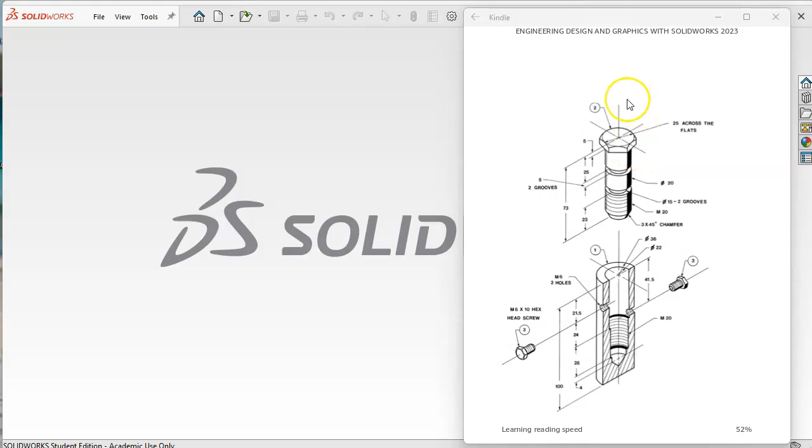The hex on top, I'm just going to make this circular and then pick up the hex. We're 25 across the flats, so that'll give me that geometry.

So let's get started with a new part, metric. I'll go into the front plane and open up the sketch.

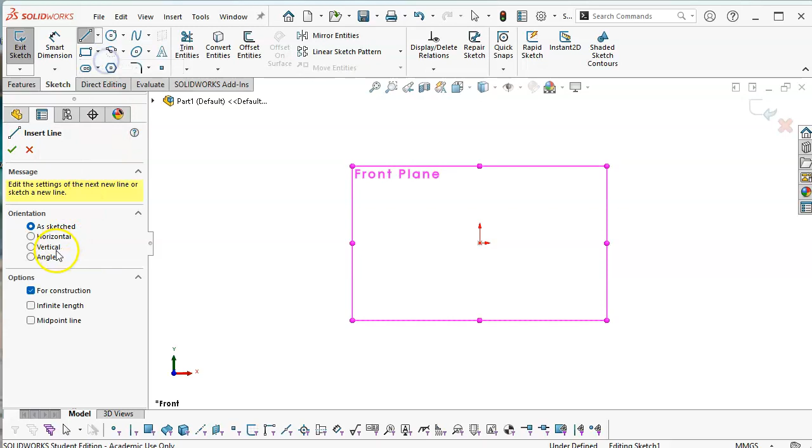We're going to do a center line, vertical, infinite length, and place it on the origin.

If it misses, I'm just going to drag it back to the origin. Occasionally, though I haven't seen it in a while, the center line doesn't go fully defined. If it doesn't, just grab it, drag it, it'll snap back to the origin and make it coincident. And if not, then we'll just add it manually.

So I want to go ahead and close this off.

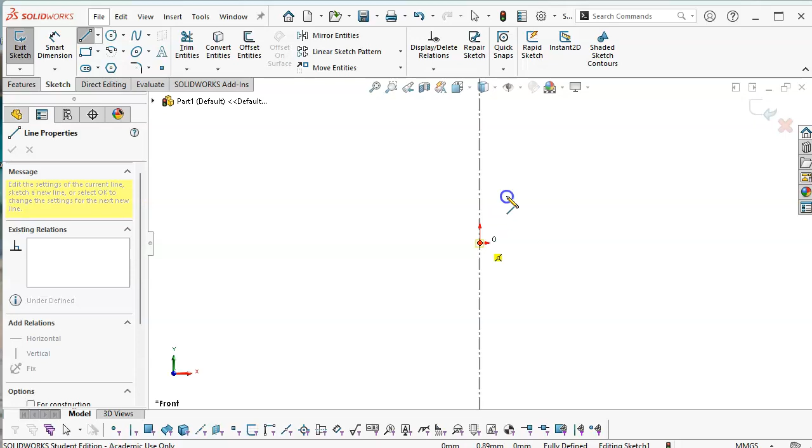We're going to look at this in two examples of what happens when you don't do the center line. So anything that's away from the center line is going to be a cavity or a hole.

And so if I draw that first, then when I go to complete the revolve, it won't ask me to close off the sketch. So I'm going to rough these in.

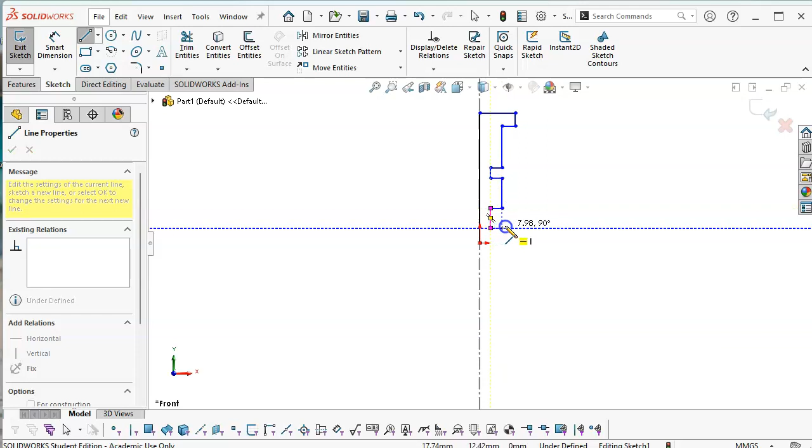And if I miss a little bit, well, we'll figure it out. So I just connect the dots. We'll make that horizontal, and deal with whatever strangeness it does, because the downside to sketching the entire profile is always whether things move as expected if they move around.

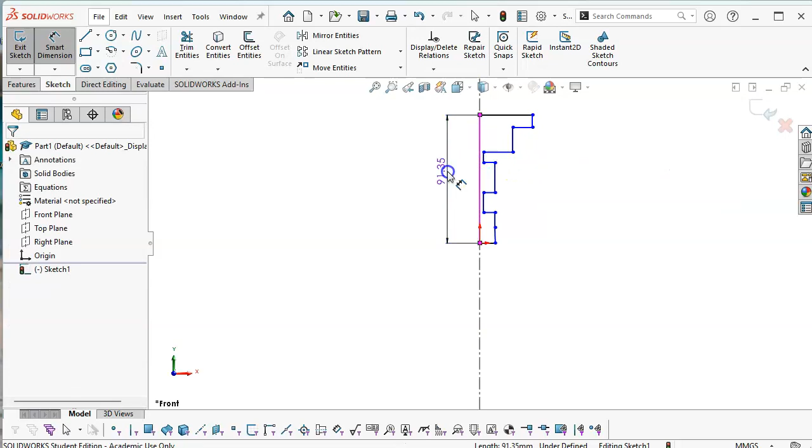So with the first dimension, it scales, and it didn't do anything really strange with the geometry.

So we can go ahead and start our diameters, and that'll be the 25. And then with the D next to our dimension, that's telling me that it's automatically going into diametral.

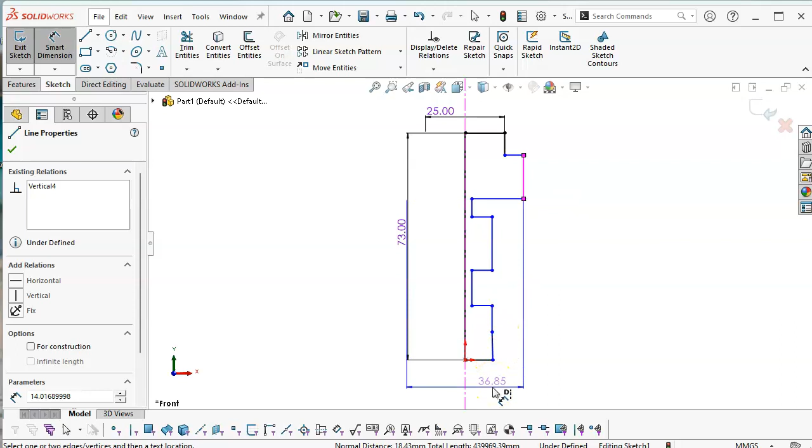So I'm going to bring that one down. We know that the body for the M20 and the 20 millimeter threads, or the 20 millimeter body, are all going to be the same.

So select, control-select. Pick the first one, hold down the control button, select, and select again.

Well, my chamfer didn't quite stay, so, oops. Let's control-Z the construction geometry. Not ready for that just yet.

Let's go collinear, now drag this down a little bit, put it in. Now we could always put this in as a separate feature, but one of the reasons we'd choose a revolve is I can get a lot of geometry in one feature.

If I was to do this as a boss, I would extrude out to here, and then the center section, and then here, and then go to the next one, and then just kind of keep building up.

Or I would draw the center to the full length, and then add the offset for the notches. So it would end up being at least 5 or 6 features.

So let's go with the two inside - we'll make those collinear, and they're also both 5 millimeters, so I can set those to equal.

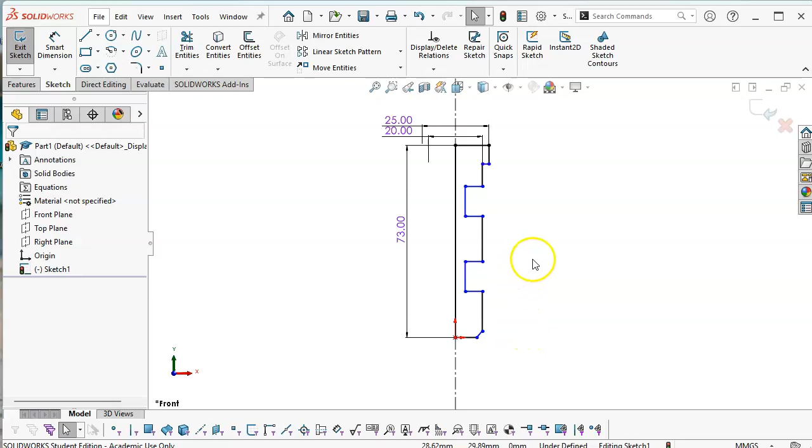We have a 5 millimeter, diameter of 15 millimeter. So we'll pick that back up. Because I did something else with the relations, it jumps out of the diametral mode.

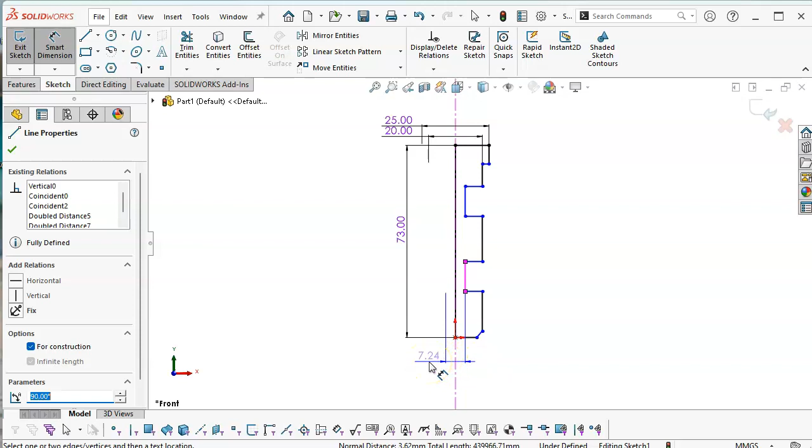And just keep in mind, when you're between the object and the center line, you're creating a radius. When you're on the opposite side of the center line, that's when it jumps to diametral. So 15. And to get out of diametral, then we're going to go ahead and hit escape.

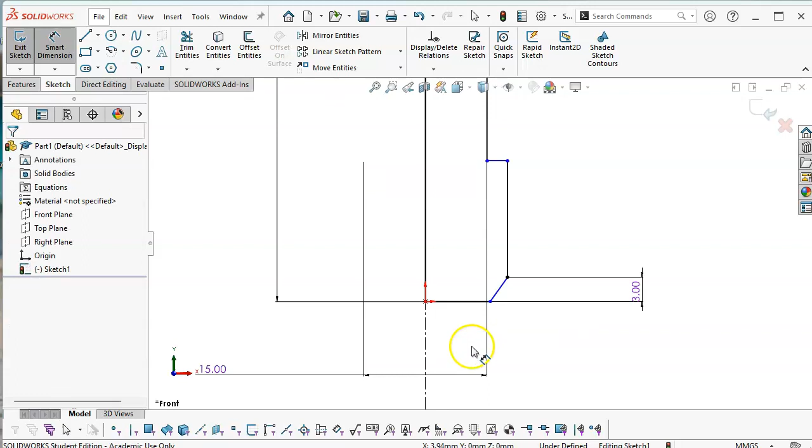All right, so we got 3 millimeters for the height. And I got the midpoint, so I'll zoom up a little bit more. And the 45 degrees - to the first section is 23.

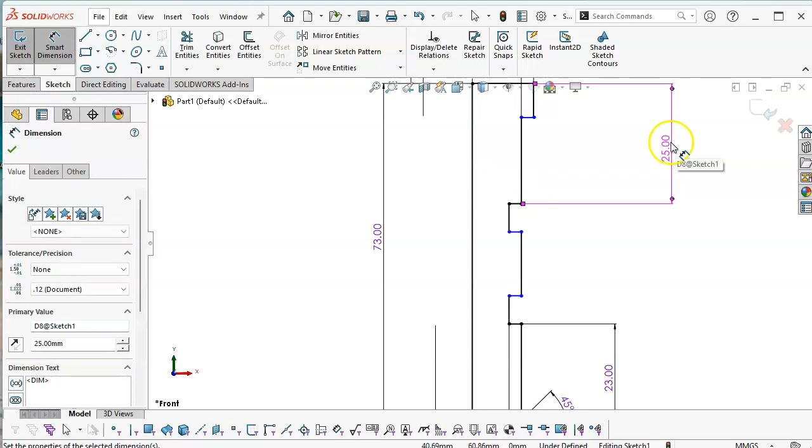Just using the scroll wheel again to move around and create the geometry. So the 25 is from the top to the top of the groove, and then we have the 5 millimeter for the height of the hex.

I need to put the dimension there, and that should do it. Okay, so everything's fully defined.

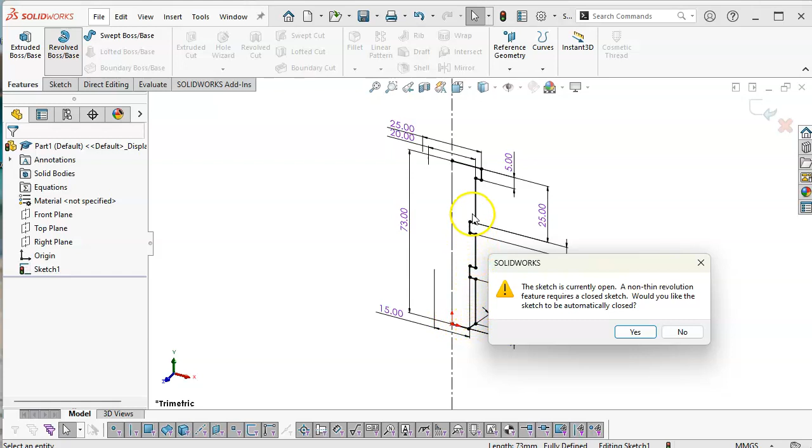Now, one of the rules is that if I have more than one center line, it's going to ask me which to select. By drawing this piece first, when I do the revolve, it's automatically going to give me the preview. So I'm going to switch this over to a construction line for the example and go to revolve. It says the sketch is currently open, which would make this a thin feature, meaning it would have an offset around all of this geometry, and the inside would be hollow.

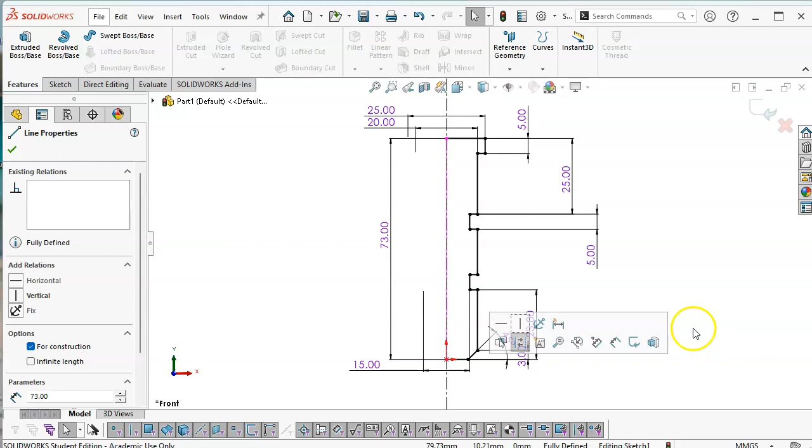So if I say no and kick that out, I'm going to go back and find my center line. One of the problems with duplicate entities is that I have to find that center line. So I'll do a left to right window pick and go back to from for construction, uncheck that, and go to an object line.

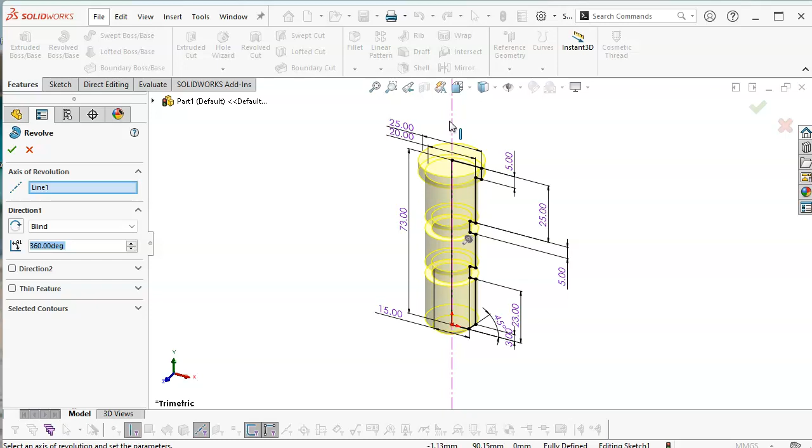Now when I do the revolved boss, you can see no warning, 360 degrees, one center line. Even if there are more center lines, I've created geometries that I needed to mirror or to create dimensions from, and it just means that this box will be empty.

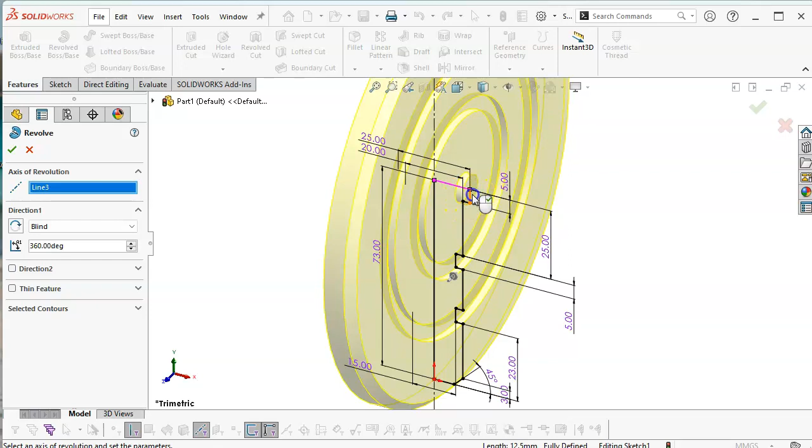I come over and select it. At any time, as long as this is not self-intersecting geometry, I can change that shape. But when I get down to something like that, it doesn't show me the preview because this little nub will overlap into itself. So self-intersecting geometry is not going to work.

So we'll go ahead and create our shape and put the hex on the top. So back into the sketch.

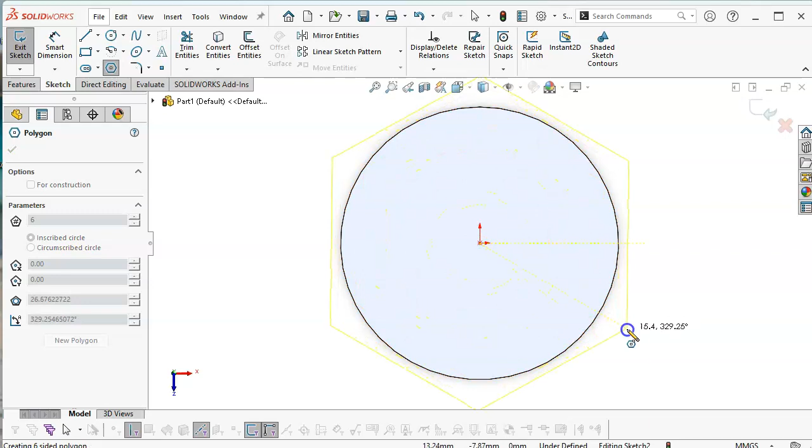Because we already set it at 25, I can drag this out. We're on an inscribed circle. So I'll just get out of that, hit select, control select, and this is one of those cases where we can do co-radial, same center, same radius.

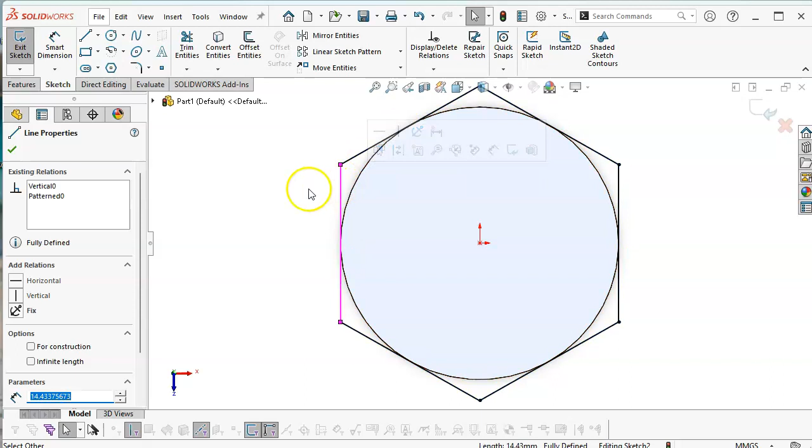Doesn't really matter for our flats. One of them will be vertical or horizontal, just depends on how you want to see it. I'm going to rotate over so I can see that bottom surface because that's what I'm going to use to create the extrude.

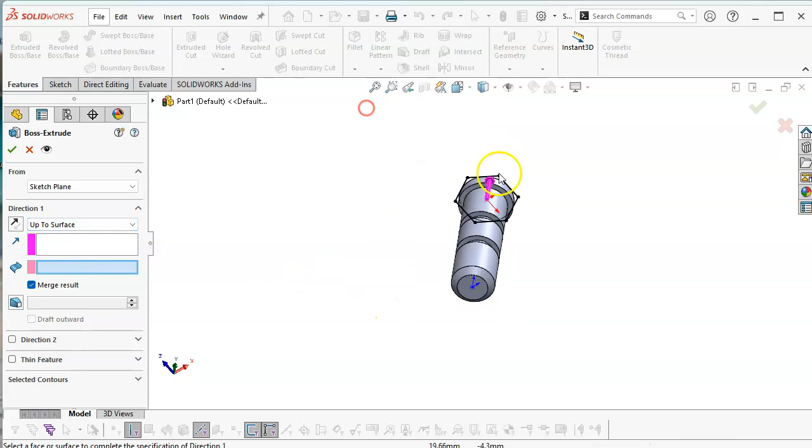Extruded boss base, up to surface. Well, it rotated back for me, so I'm going to rotate it again. Pick that face, and that's going to create the extrude.

All right, we'll do the chamfer last. There's not really a number given, so we can pretty much pick whatever we want, probably 2 millimeters on that chamfer. But let's go ahead and go into the threads. Chamfers and radiuses, as a general rule, I want to do last.

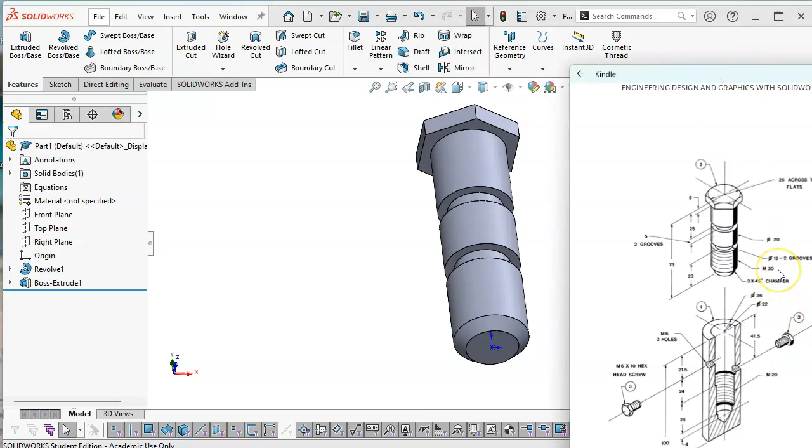All right, so our drawing says M20 but doesn't give us a thread pitch. So whatever we pick, we're going to have to stay with that. So I will pre-select first.

I want this bottom edge. I've already added this to my features, but it jumped off the screen again. So right at the very bottom, insert annotations, cosmetic thread, and we're picking the edge.

If I hadn't pre-selected, I would have to pick that. It's going to be machine threads, and what are the other ones? Straight pipe tap thread.

M20 by 2.5, so just doing a quick conversion to inch, that's about 100 thousandths, which would be 10 threads per inch. The 2.0 is about 80 thousandths, and the 1.5 is 60. So kind of a fine, extra fine, fine, and coarse.

So we'll just go with the 2 millimeter, and I want this for a depth. Oh, there's the end condition. Let's just go up to next, and it should find this geometry and terminate.

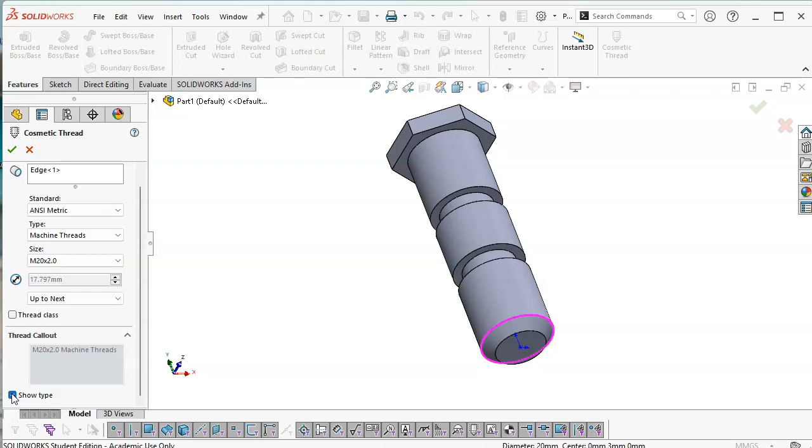All right, if you show type, it puts in the note, and I'm not overly fond of the note. They are functional, but I don't want to see the machine threads note. I usually put other details with that geometry. All right, so that gives me a cosmetic thread.

At that point, I have enough information to create the working drawing, except for my chamfer, but we have enough information here to create the drawing and have our part. So for the cosmetic thread, I can make a configuration for simple threads, where when we do modeled threads, you want to make the choice because it's going to increase the file size.

Speaking of which, might as well go ahead and save.

Let's go into my drive. One thing to note: if you're using a cloud drive for your working folder, we had an issue in the lab the other night, so I shouldn't really be doing this out of the SolidWorks save as, but we'll manage. This one is for Google Drive. We want to make it available offline, so if there's a disconnect, you'd still have access to this folder. I already created my P6-11 folder. For my project, we're going to call this the hex screw and save it.

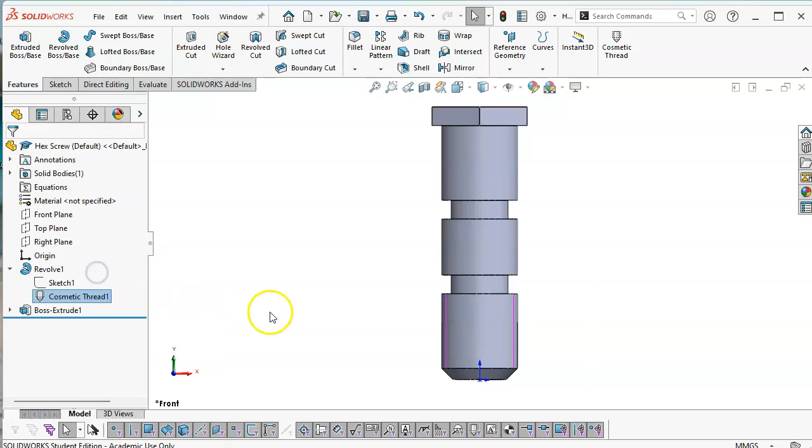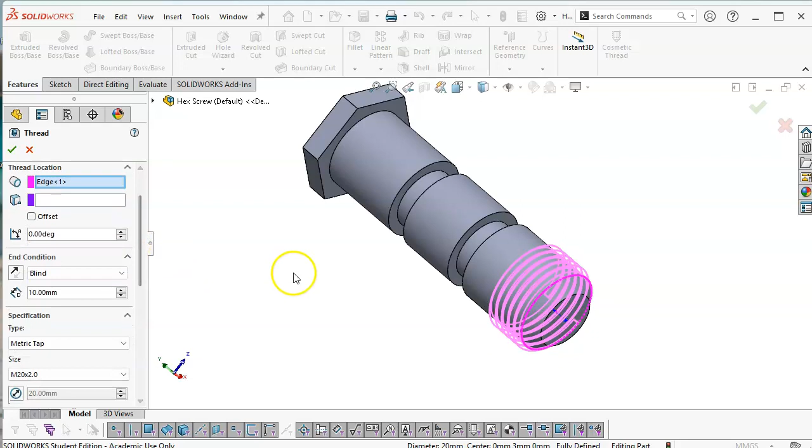So let's continue on with the threads. I mentioned we can create a configuration, or I could just hide these and determine the thread now. Modeled threads make the drawing a little less readable, which isn't my preference. So when we go to the hole wizard and then the thread, it's going to warn you about production quality threads. It'll be close enough for a 3D print with a little adjustment, but if you need to really dial it in, the swept cut will give you a lot more control.

All right, so this is showing me an external thread, so metric tap, and for the end condition, let's go up to selection and I'll grab that face, and I want to see these in detail.

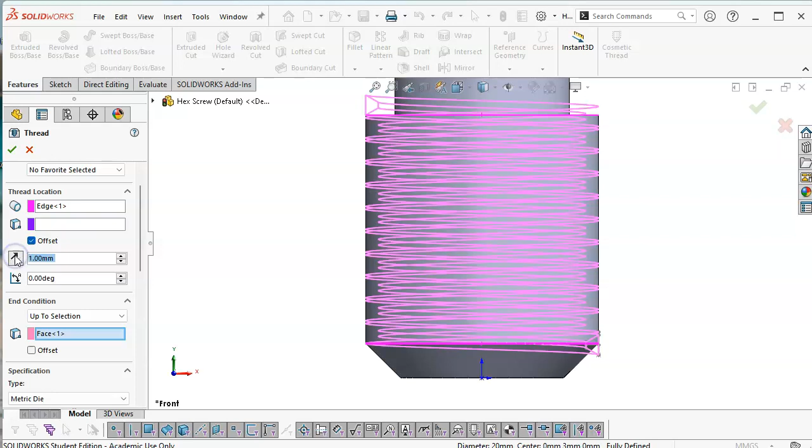All right, so we need to switch to a metric die. The tap makes internal threads, so we could use that on the body, but it's not going to be very functional on the external. You can see this thread terminates here, meaning it's not really going to complete—there'll be maybe a quarter thread before it picks up. So we're going to scroll back up to the offset, 1 millimeter up, probably 2 millimeters down, which is the pitch. That gets me completely off the geometry at the bottom, and completely off the geometry at the top.

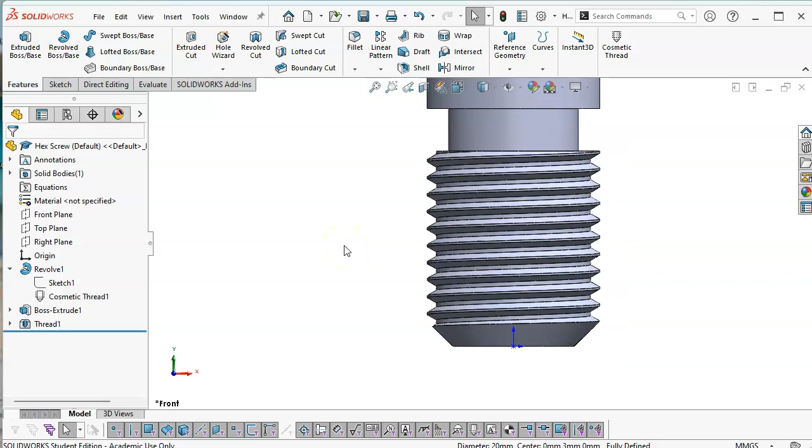Okay, let's go ahead and see what that looks like. It has the crest and the root flats. That's a pretty big thread, so we are going to see that geometry with some decent size.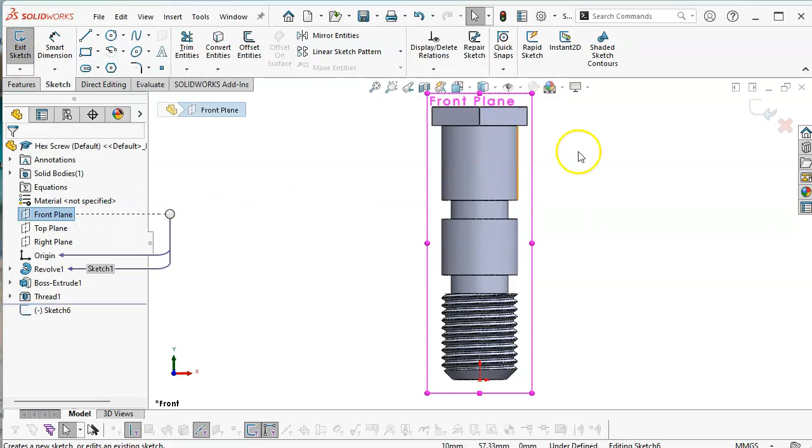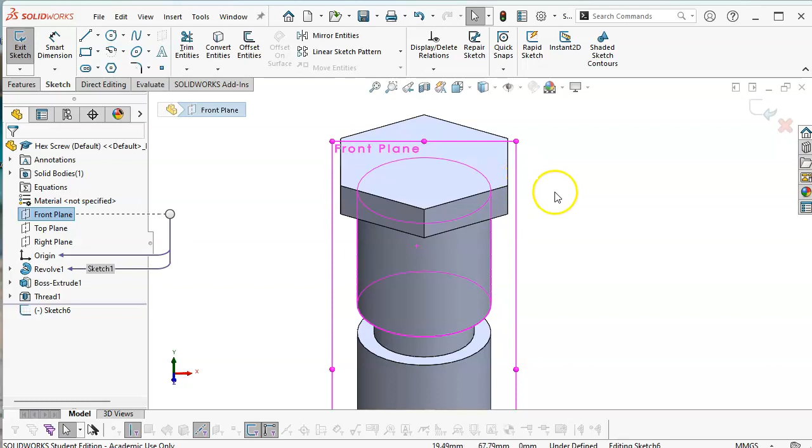All right, to finish this out, I'm going to go to the front plane and open the sketch. In this case, I'm looking at it from the side, so I want to knock the corners off. This corner is at about a 45-degree angle. So if I'm drawing on the front plane, I need to be external. We're going to do both cases, and either one will work—you just have to gauge the results.

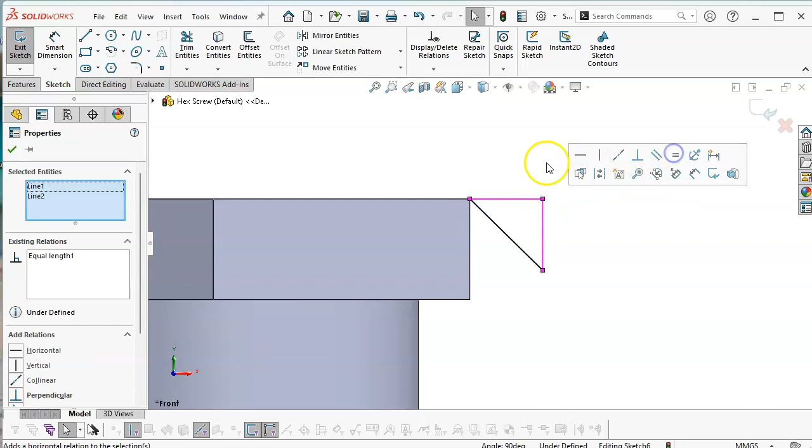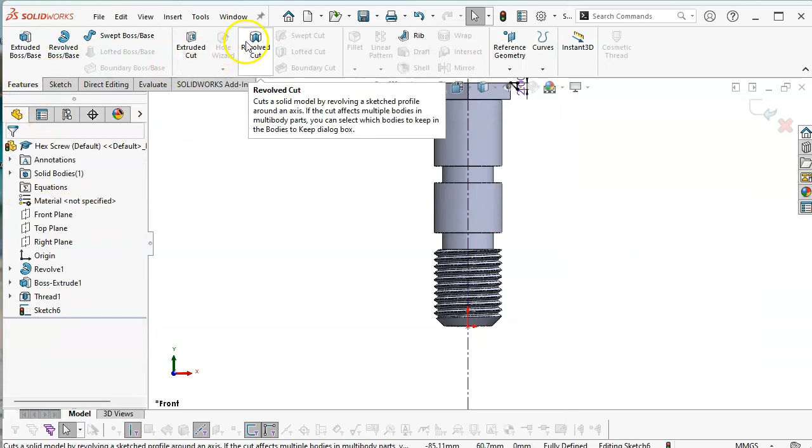So I'm going to start over here and bring that down a little ways. I have a choice of putting in the 45-degree dimension or just making the two lines equal and setting a dimension—we'll go with 2 millimeters to see what they look like. I don't have anything to revolve around here, so I'll have to put in a center line, vertical, infinite length, placed on the origin, and we can go ahead and perform a revolve cut. You can see it knocking the corners off of our geometry.

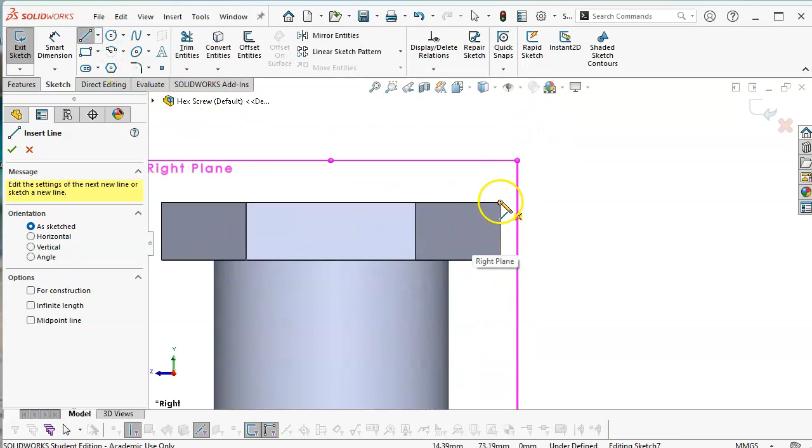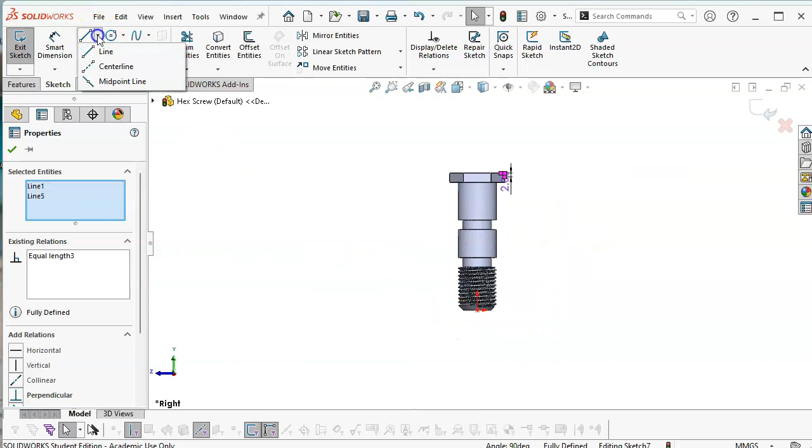In contrast, if I suppress that and sketch it on the right plane instead, I would want to utilize the interior, go to my dimensions, set my 2 millimeter, and make those equal. Same process with the center line—usually I put in center lines first, but it doesn't have to be. So, same basic process; we're just ending up with our decision tree going to: do we draw on the inside or the outside? It depends on the plane you've selected.

All right, so I'm going to save this with the geometry, and we're going to see some of the difference here when we get over to doing the detail drawings. So I'll worry about configuration suppressions when we get to that point.